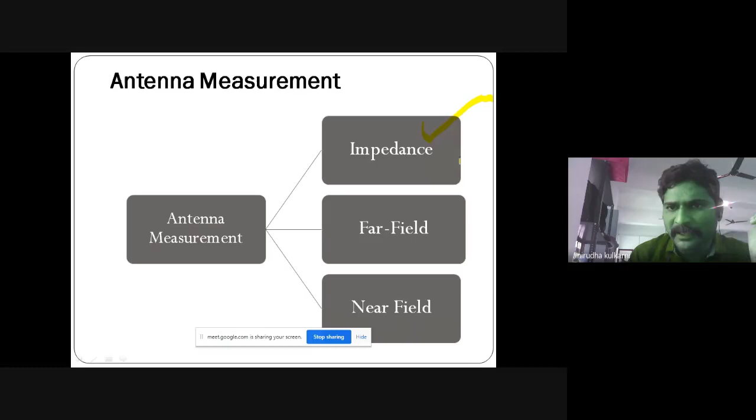Because again, if there is conduction, there is very little leakage radiation coming from your antenna. And if there is less leakage radiation, the EIRP is very low. Okay, so let's first quickly see what kinds of measurements we comply with for the wearable antenna. First is your impedance characteristic, second is far field measurement, and third is near field measurement. As we know, impedance measurement is part of lab testing, like with a network analyzer.

We will check parameters like impedance bandwidth, then the return loss, tunable bandwidth, or VSWR bandwidth. When we talk about the impedance bandwidth, basically it shows at what frequency your antenna satisfactorily works for the 50 ohm impedance, or where your antenna is fully resonating.

But in the wearable antenna, you see this picture. In this picture there are circular kinds of holes, and you try to fit an object that is rectangular, correct? It is fitted, but with the help of some external tools. What are the external tools to handle the impedance parameter? Generally, to handle the antenna impedance parameter, you require a matching circuit, which is the LC matching circuit, very close to the feed of the antenna.

So if you require some kind of L or C matching, some people also do T type or pi type matching for the wideband structure. But generally, the matching circuit is composed of inductors and capacitors, and they have a different impedance track matching phenomenon also. So naturally there are two types of circuits. One is the RF ground circuit for your antenna, where the ground substrate is covering things, and the second is the matching circuit ground condition. So there is an LC ground condition and an RF ground condition.

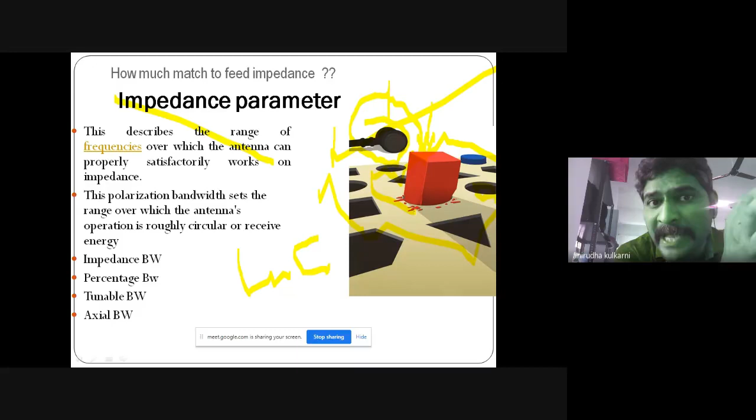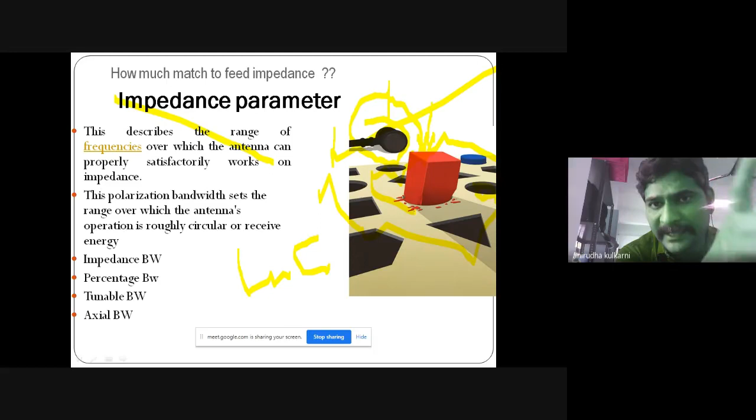With two ground conditions, there is a very critical stage for your antenna for the resonant matching. It is not straightforward matching, because every circuit you attach to the antenna will add its ground looping current, and that ground looping current also takes part in the radiation. This is the first biggest challenge in wearable antennas. Due to the matching circuit and its ground presence, your return current varies, and theory clearly says that if your return current varies, your forward current varies. If the currents vary, your near field gets distorted, and automatically the far field gets distorted.

That's why my first point is, whenever you are doing impedance matching for the wearable antenna, it is a very tricky job, and you do not get a smooth radiation pattern as I showed in the first slide, which is the ideal shown by various simulation software. Simulation software always shows very nice graphs.

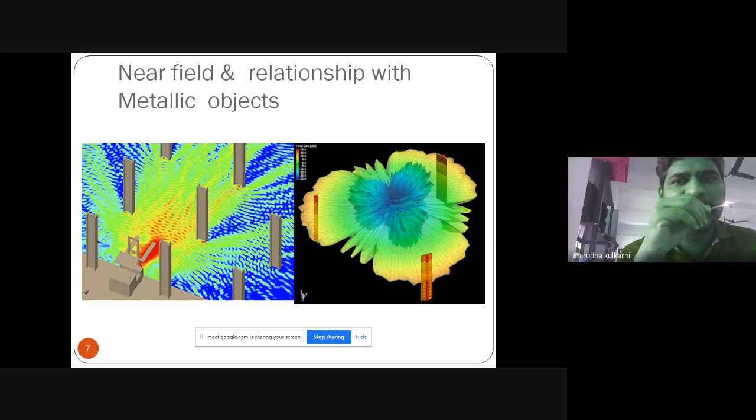I tell you again that all wearable antennas have only one problem, called pattern degradation. Even if you design a lambda by 4 antenna, what is your expected pattern? Your expected pattern is omnidirectional, correct? But in this case, you are not getting an omnidirectional pattern. Here you are getting thousands of side lobes inserted in your main lobe. There are two reasons I already explained. One reason is related to the impedance, the matching circuit, and the second is the metallic object. If metallic objects are there, then there is definitely a problem.

Generally in antennas, we are looking at three types of pattern. One is the pattern called omnidirectional. One pattern is called bidirectional. One pattern is called a very unidirectional pattern. So three patterns are there. The cardioid pattern, doughnut shape pattern, fan or pencil, figure of eight, these are the popular patterns.

But unfortunately in wearable antennas, this kind of directive pattern is very hard to find, because your wearable structure is not that supportive for a pencil kind of beam pattern or figure of eight kind of pattern. Here, for most wearable antennas, the popular structure is the lambda by 4 structure. These are the common antennas which we see in the market. Okay. Now you see these things. What these things actually talk about is pattern.

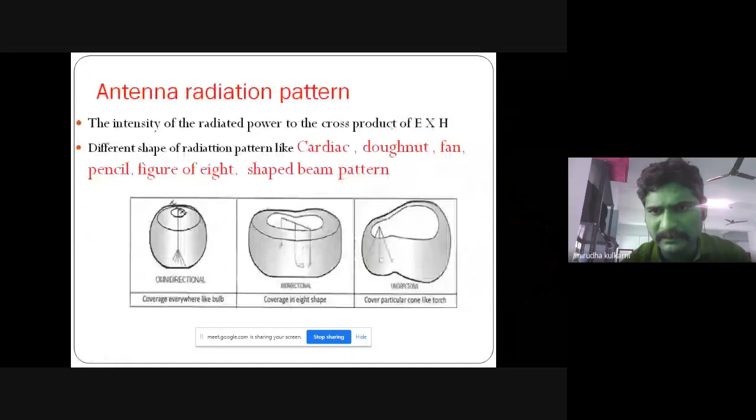So, first few frequencies: generally in ultra wideband antennas, for every frequency there is a different type of radiation pattern. You won't get a stabilized radiation pattern over the band in ultra wideband. It is not possible, correct? But in wearable antennas, the bandwidth ratio is very small and very tough. Even for 80 megahertz or 50 megahertz bandwidth, there is definitely a degradation of the pattern over the frequency. So this is the third challenging job when you are handling a wearable antenna.

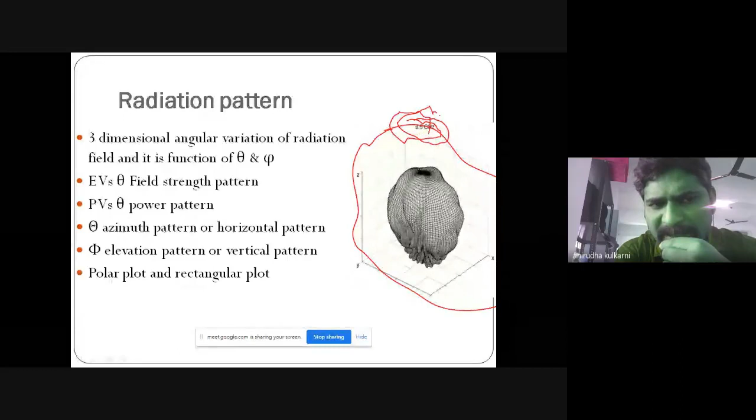When you are handling a wearable antenna, over the frequency band your radiation pattern cannot be constant in theta and phi. Basically, the radiation pattern is the field plot which we plot across theta and phi, correct? It shows our field strength pattern or the power pattern. In azimuth and elevation, you are getting different patterns in the wearable antenna.

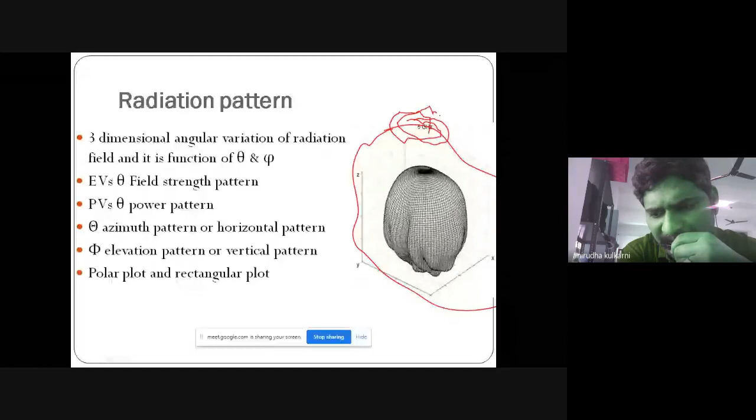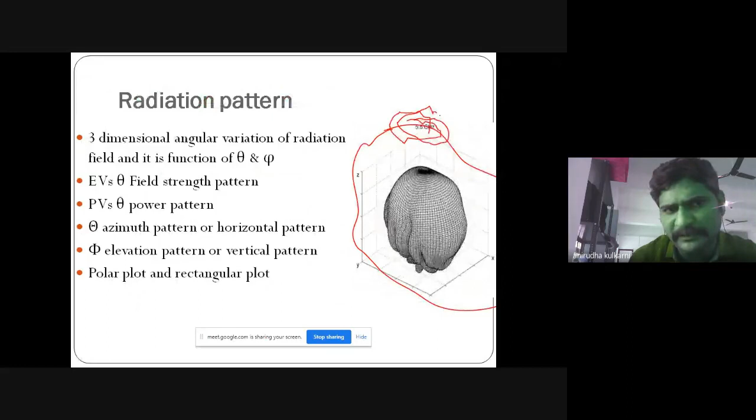Because again, in a wearable antenna, if there is corner folding, what will happen? Due to that folding structure, your elevation pattern is not going to be constant like your azimuthal pattern. That's why in the two planes, theta and phi, you are getting different patterns. Okay, so we say that across the frequency, you cannot find a stabilized pattern in the elevation and azimuth.

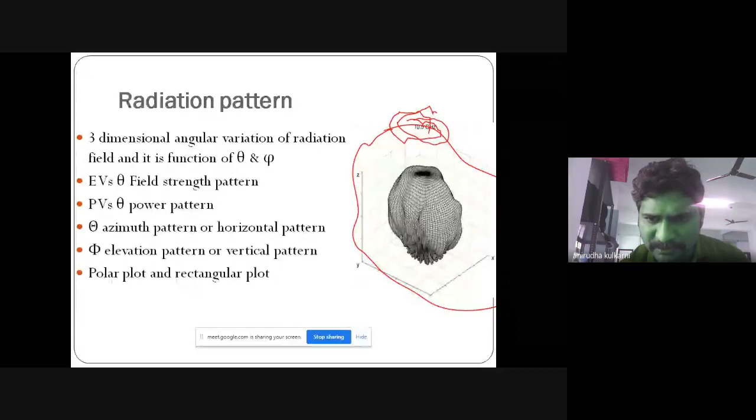So both patterns get deteriorated over the band, and the only reason is physically, when you are giving some tilt angle to your wearable antenna, your pattern gets distorted. Same like that earlier, here you can see this picture. Now there are so many side lobes. If the frequency increases, automatically your pattern cannot stay constant, and there are multiple side lobes generating over the resonance. Now we will compare bad versus good pattern.

So this is the pattern we are expecting at theta 0, but at theta 30, again there is a pattern deterioration, so the pattern gets shifted. And if you see at 60 degrees, the pattern gets multiple shifts, whereas in a conventional antenna you will get only one single pattern at the tip. But when you are simulating or manufacturing the wearable antenna, if you see the plot on the Cartesian side, you will get this 100%.

There is a shift of degree. You can see here is a 30-degree shift, here is a 60-degree shift, and there are considerable side lobes you are getting here. Here you can see the side lobes, but you can control them, which are under the limit. These red color limits are there, but within the limit there is a side lobe. But in a wearable antenna, there is pattern deterioration, which is shown in Cartesian format. You can see.

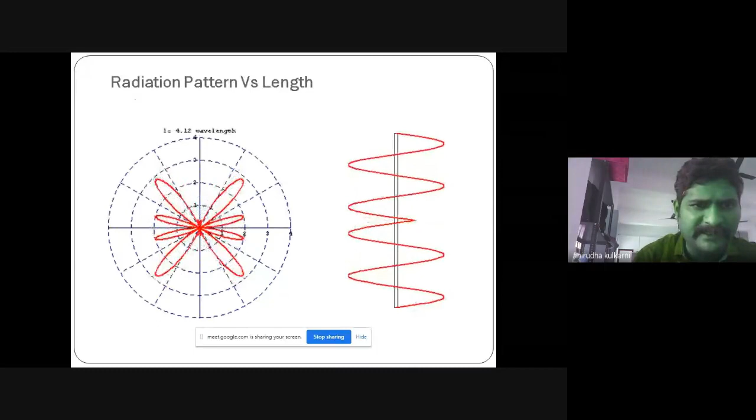Then, generally, if you want to manufacture the dipole structure in wearable format, what will happen? Ideally you should get a figure-8 pattern, but if the wavelength increases, you can see this here. Just observe it. Now I slowly increase the wavelength. What will happen? You will get multiple side lobes, so 8 to 9 side lobes for 3 lambda kind of radiation pattern structures.

This happens only for the conventional antenna, but in the wearable antenna, the story is one step ahead. You are getting 6 to 7 side lobes even for lambda by 2 structures. So that is a much more critical job for an engineer to handle the wearable antenna's pattern situation. There is a second problem related to the point-to-point link.

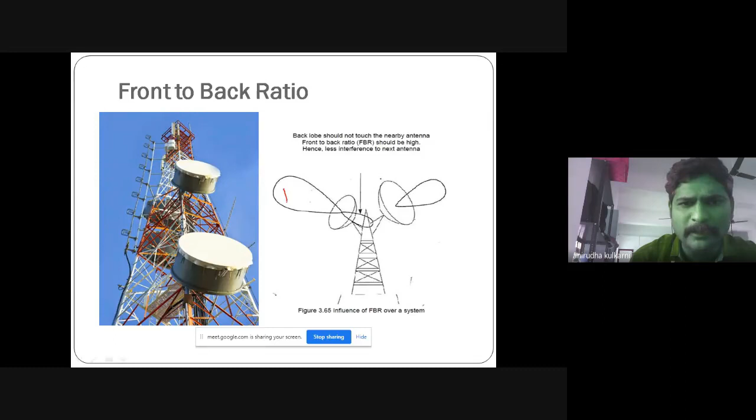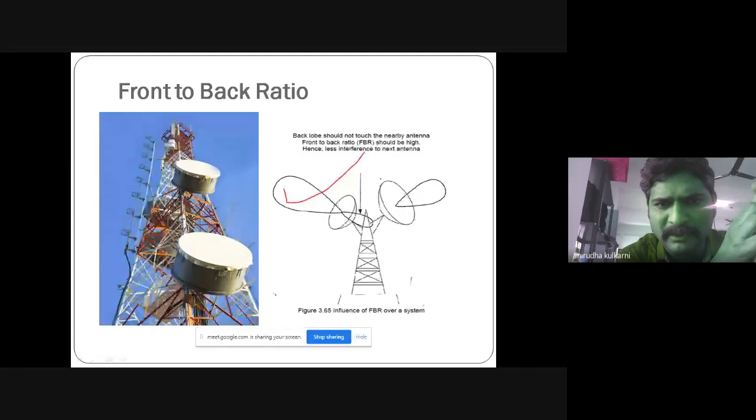You can't use this wearable kind of thing for a point-to-point link, because you need a very directive pattern with very low half power beam width. You need to maintain a half power beam width around 8 to 12 degrees, and that is very difficult in the case of a wearable antenna. So normally you don't put the toughest job towards the beam width side. Then there is the null parameter.

You can't control even the nulls, because if you are using a wearable antenna, your null rapidly shifts. So the second challenge in the wearable antenna is that you cannot control your null parameters, where your signal goes to zero, and you can't control the side lobe powers either. Here in the second picture, you can see this is the MSAT, VHF. So many antennas are there, and if you want to fit your wearable antenna, you have to declare your null parameters, and that's why in multiple critical environments, even these days, these antennas are not utilized in the commercial market.

One more very important parameter is cross polarization. Because of the smaller height of the substrate, your cross polarization level cannot be great. You only achieve around 5 to 6 dB cross polarization level.

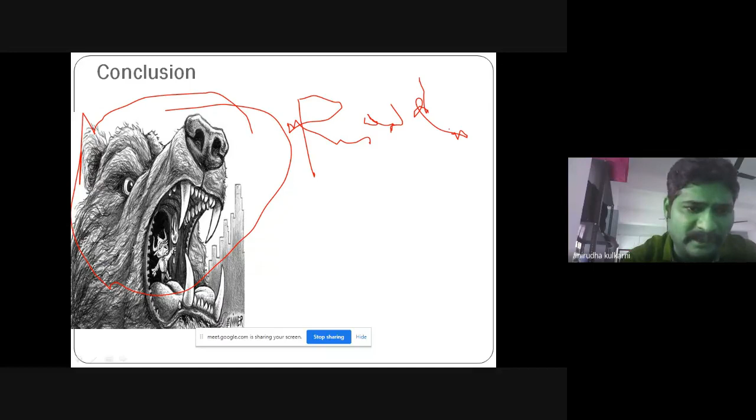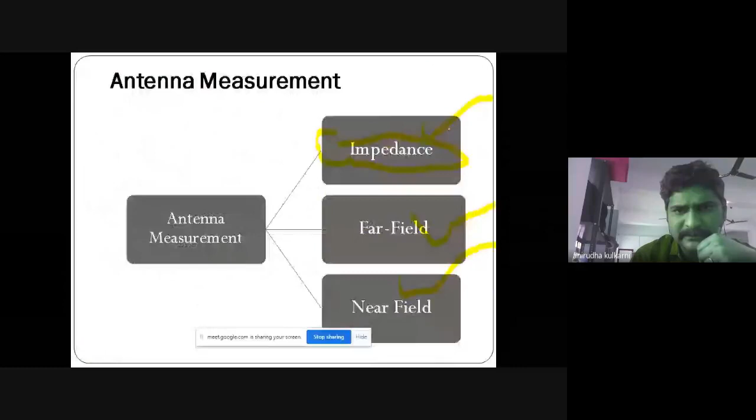In that half an hour, I wanted to present the challenges that happen on the radiation pattern side, which will destroy your pattern. Okay, so again I come to my first slide. This is our aim, but to maintain the same, there are so many challenges. Four bigger challenges are there, and due to that the radiation pattern is very difficult to manage across your impedance band.

Okay, so I share one software also. CAD FEKO is the name of the software. Maybe you have heard this name. There is one software called CAD FEKO. I recommend it because I utilize the MLFMM method, that is the multi-level fast multipole method, which is considerably good to calculate the radiation pattern after placement of an antenna.

Because see, making a wearable antenna is one thing, but when you place this antenna, you get pattern deterioration or degradation. Even if you design a lambda by 4 architecture with an omnidirectional pattern, when you place it, mostly your pattern gets deteriorated. And now I will suggest one more thing with wearable antennas: you have to make a particular coating, which will reduce the near field current. If that near field effect is reduced, your pattern gets clear, successfully propagating to the Z direction.

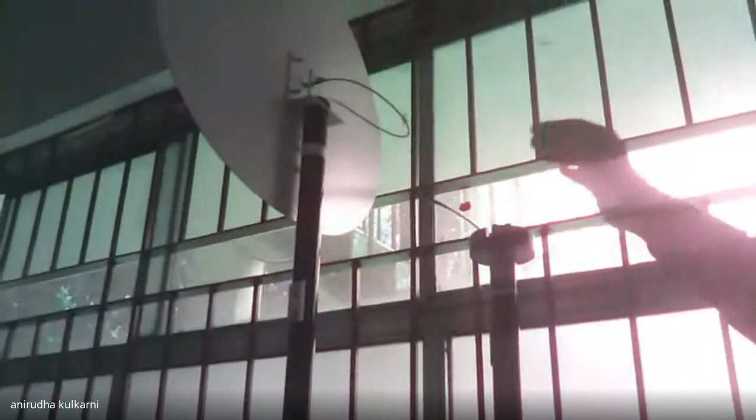Most of the time we have seen that the pattern is not propagating in the Z direction, it is going abruptly. And EIRP, effective isotropic radiated power, is also not going to be covered. If you want to handle such kind of antenna, I will show you some material right now. I will rotate my camera to you. So in front of you, here are some structures before the reflector antenna. These structures are made of PTFE material, polytetrafluoroethylene. If you utilize this material for the placement of a wearable antenna, your radiation pattern does not get affected.

So here is our test rig. People are doing testing related to range, and we call it a virtual loss test. How far your antenna should reach, we virtually give that environment in a lab, and then we calculate the loss over a particular distance. There is my friend Mahesh, who talks more about the manufacturing side of various antennas, as well as his valuable experiences from the last few years in this antenna region.

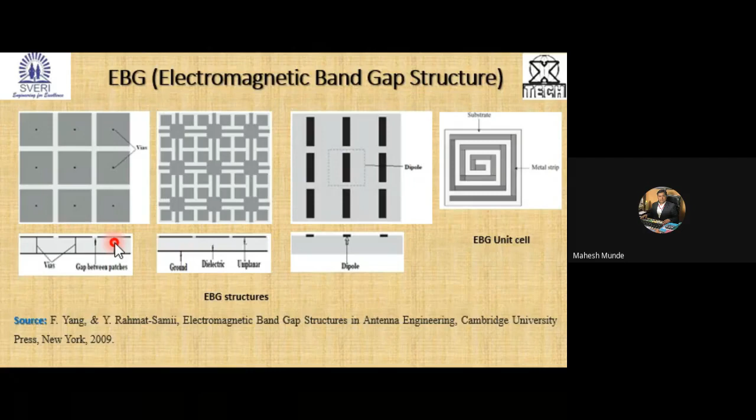So this is my conducting part, a perfect electric conductor, PEC material. Earlier days it was very difficult, but now due to the evolution of micro machining and fabrication techniques, machines like LPKF can create vias very easily.

This has become simpler and attracted more designers towards EBG structures. Stop band and phase reversal characteristics, one of the most prominent features of EBG, can be utilized. Whereas if we use the same material and print on it, the cost can be kept optimum, as far as AMCs are concerned, because in case of AMC or metamaterial, we require different materials, but on simple FR4, you can create this.

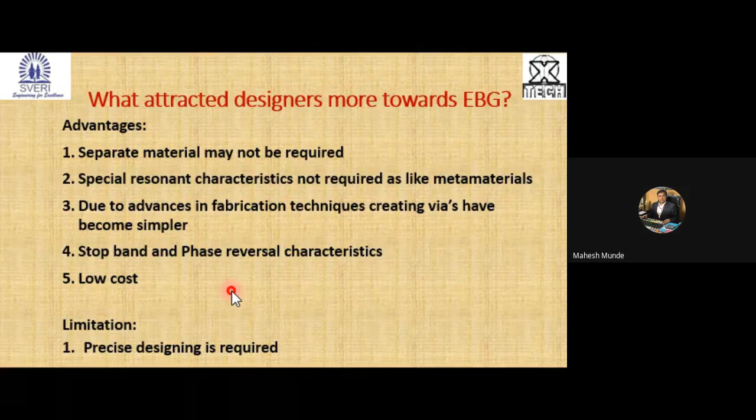The only limitation of using EBG is that you require precise design and precise dimensions during fabrication. Manually, your results might vary from the simulated ones at a very different rate. But if you go with micro machining or automated fabrication machines, the results will be much closer and much better. So EBG structures are artificially periodic structures, most often periodic, but some researchers have utilized them in non-periodic natures also.

These are structures which either prevent, that means stop or block, a particular band of frequencies, or assist those particular frequencies. That means it can filter out or enhance the same band of frequencies. So it has both properties or capabilities during propagation of EM waves in a specific band of frequencies. For a particular application, you have to design a particular EBG structure. Not all EBG structures are suitable for all particular bands.

So one of the challenges is to design wideband or ultra wideband EBG structures, and you can get a thesis on wideband or ultra wideband EBG structures. What they normally do is, at any incident angle, if plane waves or surface waves are incident on that, at any polarization, might be linear, circular, or elliptical...

They can either block the wave completely, meaning good efficient filters can be designed—so an antenna can be a very good filter too—or particular pass band or stop band filters can be designed efficiently. Nowadays a new concept is coming out, antenna and filter combined. So a few researchers have named that 'filtenna', a filter and antenna combination.

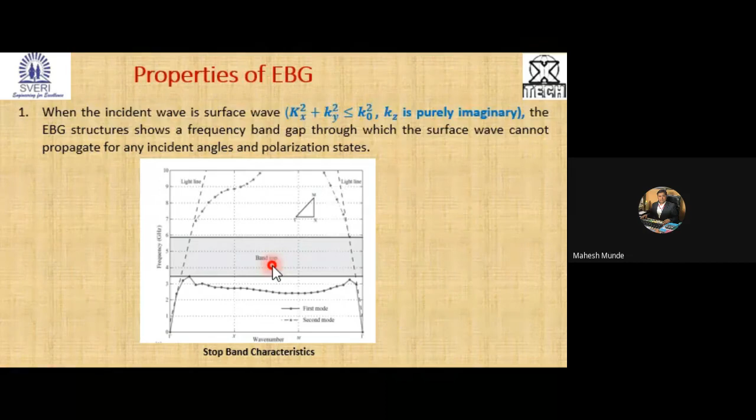Another property is, if Kz gets a real value, then my incident wave will act as a plane wave, and whenever the incident plane wave hits the material, the reflection phase of an EBG structure will vary from plus 180 to minus 180, and a point will come where you get 0 degrees phase. So if I get 0 degrees phase, that material will resemble a perfect magnetic conductor, which is not available in nature. So we are artificially creating this material.

So at a resonant frequency of 5.8, if my application belongs to 5.8 or 2.4, in case of wearables we normally prefer the higher bands nowadays, 5 gigahertz onwards. So 2.4, either for WiMAX 3.5 or 5 onwards, might be 5.176, might be 5.5, might be 5.8. Newer 802.11 ABGN standards are coming out.

So to achieve this reflection phase of 0 at that particular point, your tangential component will become completely 0. That means no surface wave will exist, which means I'll get a better impedance match. So my VSWR in that particular band will be below 2. This is how we utilize the property of the EBG structure.

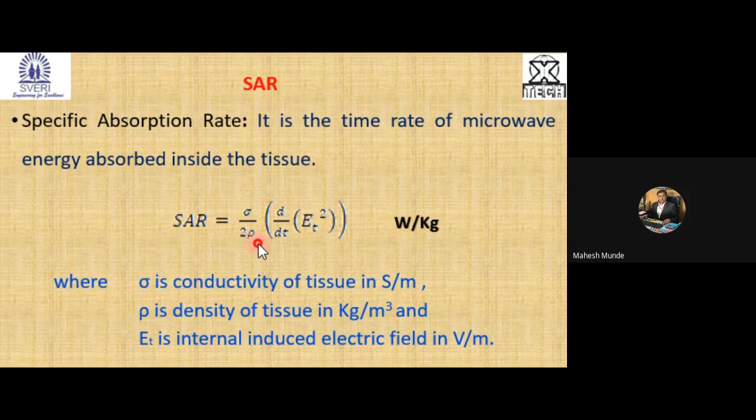So you get many voxel models inside the simulator that you can work with. Specific absorption rate is a standard and measure for absorption of RF fields, and the United States has adopted standards and set guidelines based on the recommendations of ICNIRP and FCC.

So they have set that in case of mobile phones, when you are using one near the head, the SAR value of your mobile phone should not be more than 1.6. This is what the Indian TRAI and DOT also refer to. TEC is a separate division of DOT, where any foreign or Indian company launching a mobile phone into the market has to get compliance cleared from TEC. The SAR value should be less than 1.6 watts per kg in 1 gram of tissue mass, and they use the Cosmore model to evaluate this SAR value.

The European Union has adopted some standards that are less stringent, using 2 watts per kg in 10 grams of tissue mass.

So the FCC governs whether your compliances have been met or not. Without FCC certification meeting compliance, the particular handset is not approved, and only then will the handset be launched into the market.

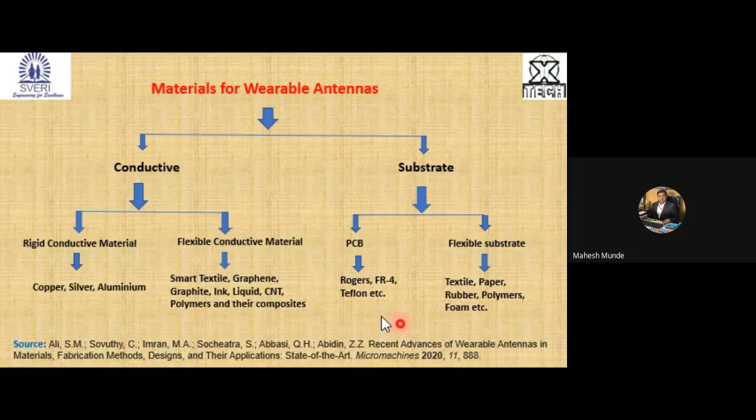And nowadays the flexible materials are also available. In case of textile, either paper, rubber, polymers, foams, these are available. So these are the materials you can explore. This is one of the good papers where they have shown different materials along with their properties.

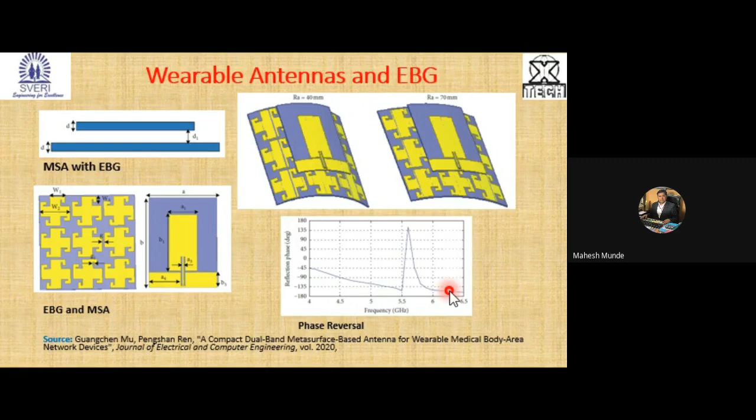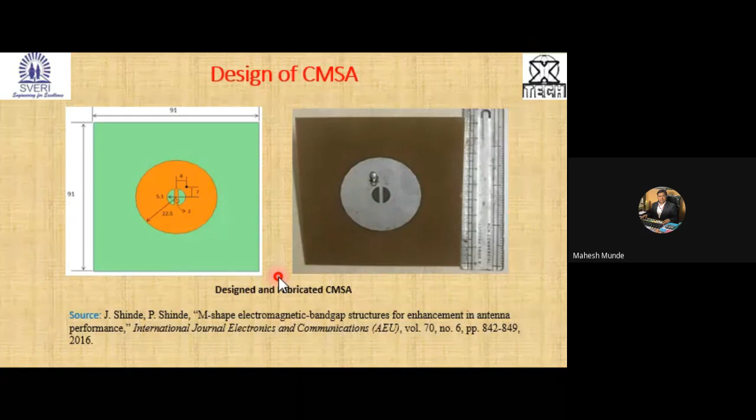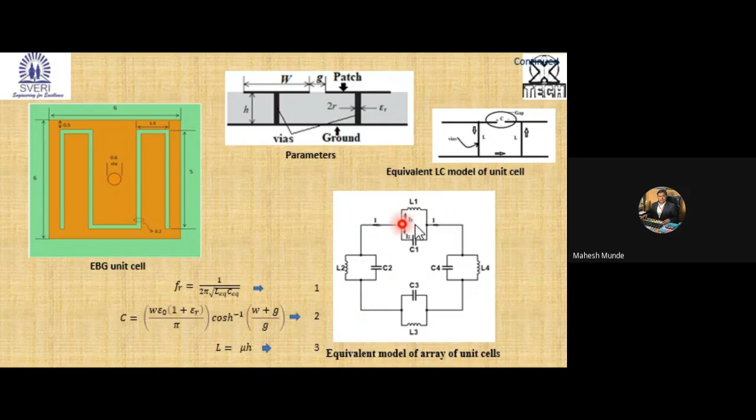So this is in what fashion you arrange them. You need to carry out the equivalent model of the unit cells also. So you will get a model of the entire EBG structure, and how it will enhance the properties can be seen. In this particular fashion, the antenna will be in between, and my array of unit cells is going to surround the antenna. That is how the equivalent model will work.

So at any plane incidence angle, the whole ground is acting as a pure conductor. The waves have a property that if the surface waves are moving in this direction, on the ground they will move in the reverse direction. So the magnitude or the gain will get reduced in that case.

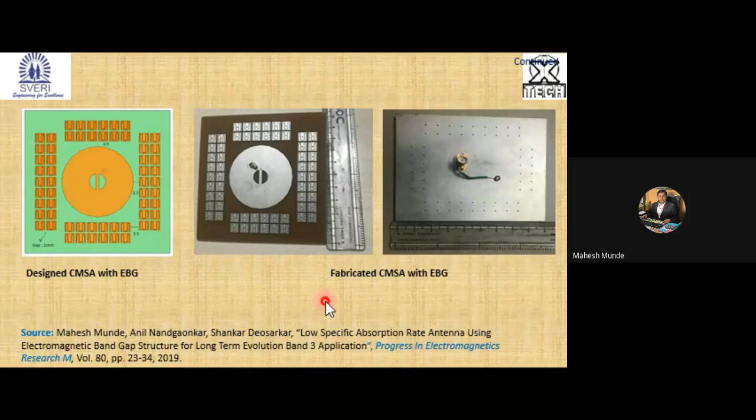So how to enhance it? The current will move through the hole, go down to the ground plane, get a 180 degree phase shift, come back on the top and be diverted towards the front direction. So in this case, we don't require another EBG structure or a different material. The same material can be utilized to create an EBG structure. This is the enhanced version being published in PIER.

So now, how do I analyze this unit cell? There are 4 different methods, but we have used the suspended line method in HFSS. Now, which resonant frequency must I tune to? My application was 1800 megahertz, long-term evolution, band 3. First we have to target the application of the antenna and then we can model the unit cell.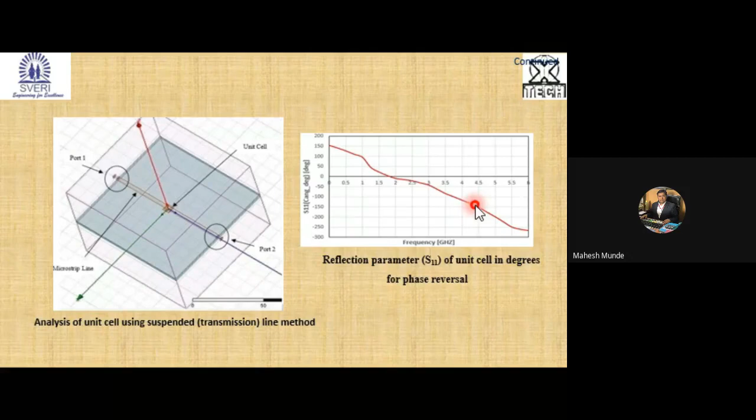These properties are available on the ITIS Foundation website. They continuously go on updating, and the database is free. You can simply put in the frequency and download the properties of all the parts: the pancreas, wrist, bones, muscles, heart, kidney, if you're working on special health applications. One of my friends is working on tumors, so he has downloaded different properties from the same site for hyperthermia treatment.

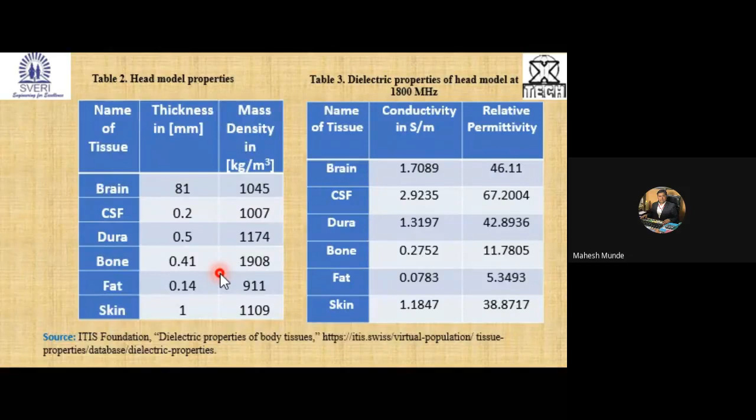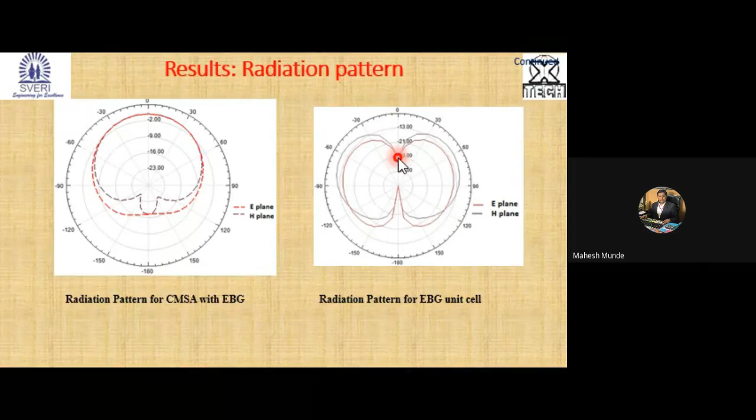These are the radiation patterns. With EBG, my radiation pattern is much smoother in the E plane and H plane. This is for one particular unit cell, a donut-shaped pattern in both the E and H planes. These are the gain plots. 2.2 was the simulated gain of the antenna without EBG. The gain for one particular unit cell is 1.22 × 10^-2, so the smaller 6 × 6 patch contributes around 0.012 dB of gain.

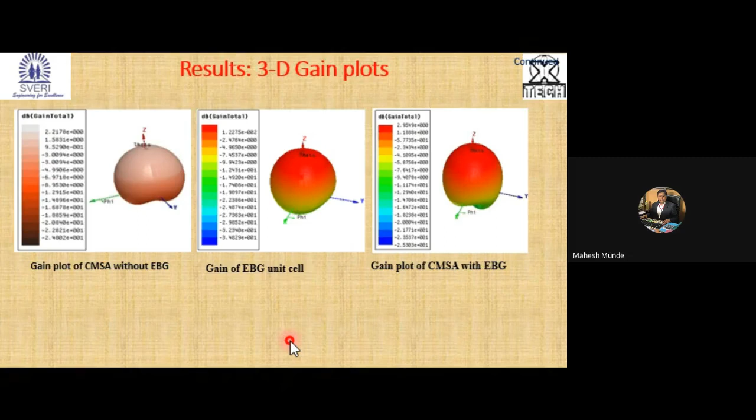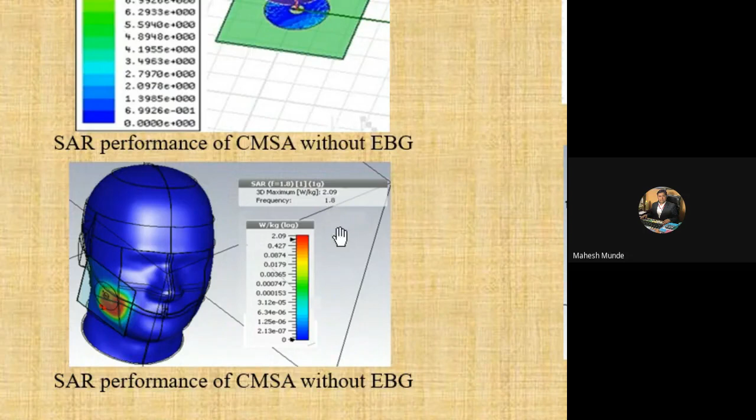The most important part is specific absorption rate. In HFSS, based on the color shade, you have to identify what the value could be, but CST gives the direct exact value. So CST is much better for SAR measurement. Without EBG, at 1.8 for 1 gram of tissue, it was 2.09, which is above the limit of 1.6 watts per kg. So how do I minimize that?

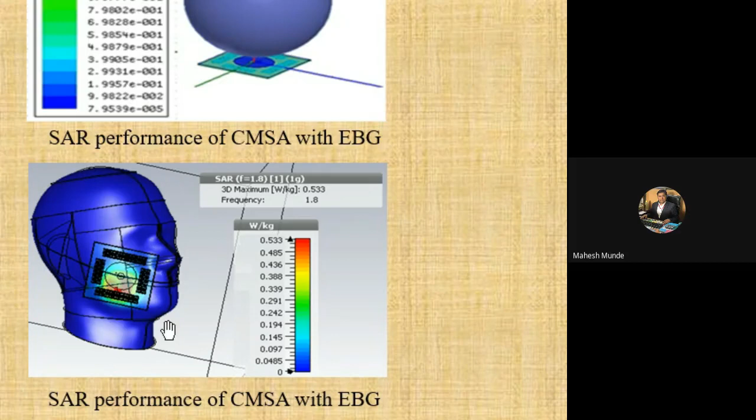So this is how it is utilized. Myself, Anirudh, and our team have come up with a very innovative and very low cost solution for measuring the antenna: how I measure the antenna in open air.

In case of an anechoic chamber, to build an anechoic chamber I require around 30 to 40 lakhs investment. So why not use this? This entire measurement setup is around rupees 5,000. So these are GPS locating devices, and we have tested the antenna in a live environment as you use in your handset. So these are walkie-talkies, the programmable walkie-talkies.

Normally these walkie-talkies use much lower bands in megahertz, around 415 or 470 megahertz. But these were programmed for 6 different channels, and the band was tuned to 1.8. The antenna is 1.8, the same frequency, but only with the EBG structure. And this was the main base station antenna, and these two were roaming antennas, and they communicated well.

So if time permits, I'll show you the video, a small 4 minute video on how we evaluated the radiation pattern. And I could show you in MapSource, which is one of the software. In a live environment, we could check how much range I am getting and what my radiation pattern is. So this is the radiation pattern, omnidirectional, which is required in most mobile handsets or handheld devices. And this is the range, around 300 meters we have covered, by providing 0.5 watts input power.

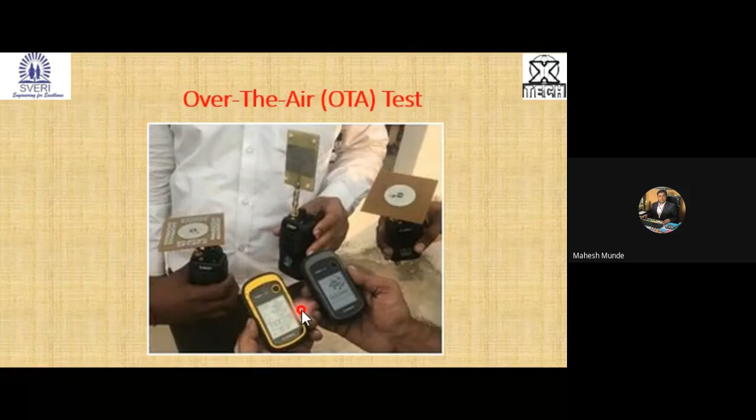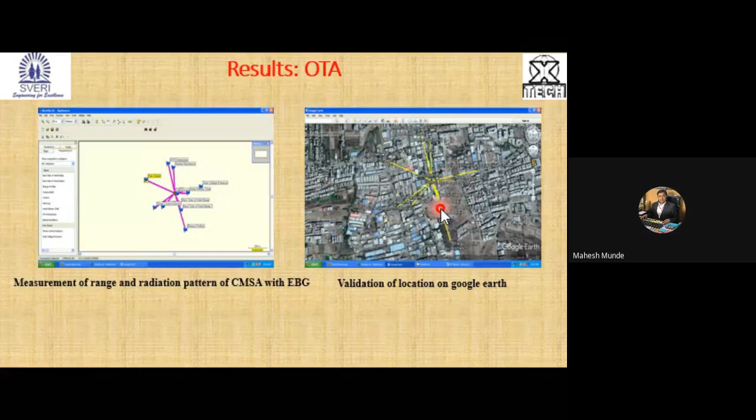Some of the observations we have already discussed, so there is nothing much in discussing these conclusions. Mostly what we could see is the radiation patterns are enhanced, as well as a particular stop band. Beyond that particular band, 1.8, the bandwidth I required was around 200 megahertz. Above that, the entire band was blocked. So a much finer selective receiver you can design using EBG. This is one of the prominent features of EBG.

Now, in case of selective receivers, nobody has yet used the EBG structure. This is one objective you can set and use. So deploying an EBG structure will reduce SAR considerably. The main intention was to reduce the SAR. So this was another design, the annular ring, basic design. These are the formulas through which the length and width were calculated. So the earlier design was with the partial ground.

The antenna is the well-known monopole, circular monopole antenna. In KP Ray's book, you could find the same design with some different dimensions. Now that has turned into an annular ring. The main thing here was the SAR was very exhaustive. SAR wasn't coming in the range below 1.6. So the novelty of this particular design is giving two different input feeds.

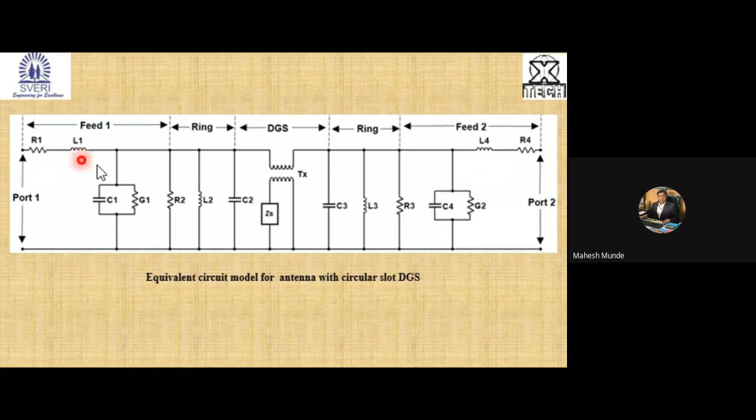So this is the fabricated prototype. This work was published in PIER B recently in October 2020. This is the equivalent circuit of the DGS. So this is the DGS, and this is my ring part. This is another ring part, annular inner and outer, whereas these are the different feeds, feed 1 and feed 2. What you could see is the parametric study we did for different dimensions, such as feed length.

So it was optimized to 23 mm. Then different widths, feed widths; it was optimized to 3.6 mm. What you could get depending on the reflection coefficient, or S11, or return loss, what you are getting. So this is the orange mark. What you could see is with the reduced ground, with full ground, with partial ground, with the 25% ground and the circular ground.

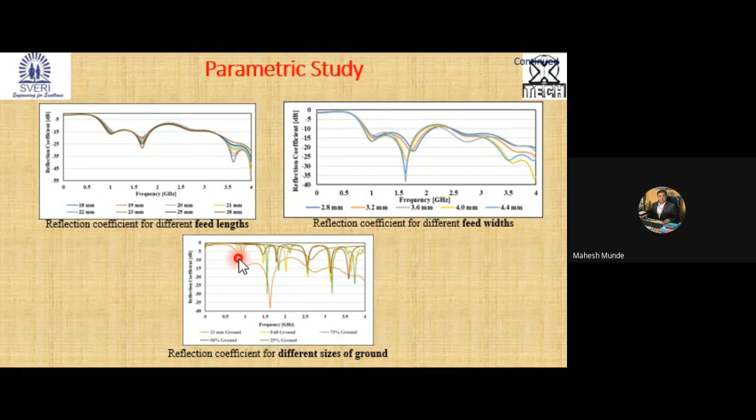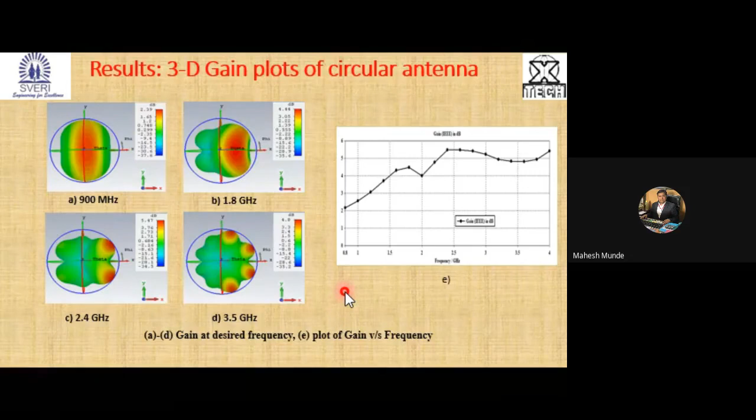But if I choose a Rogers, the 8x8 PCB will cost me around 12,000, 8,000, depending on the dielectric material, 2.2 and onwards, or in case of MICS band, 10.2. So that will cost much more. My cost will increase if I prefer Rogers. If I want to produce low cost antennas, FR4 is better. So in case of FR4, I need something different which will minimize these losses. By providing two different inputs, my losses have been reduced.

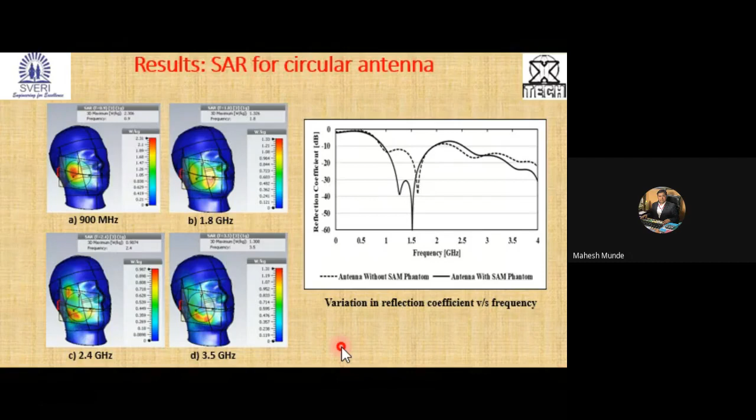Now SAR for the annular ring antenna: what we did, we removed most of the conducting portion. Without change in the band, we have tried to reduce the SAR value. Just a moment, my mouse is troubling me.

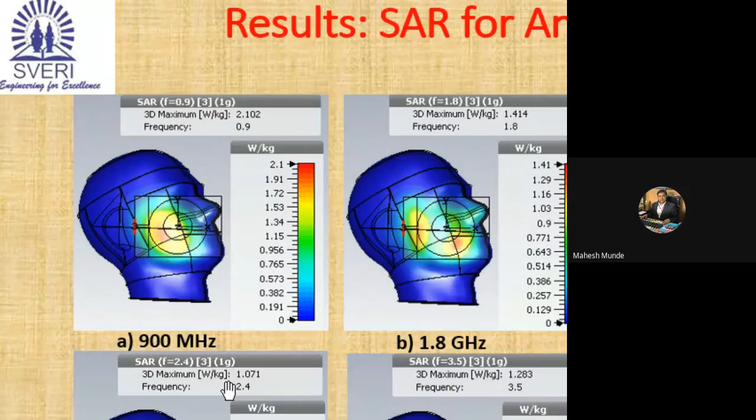You could see in the earlier case it was 2.3, now it has reduced to 2.1. We are focusing on only this one because all other bands are within the limits. Still, in case of the annular ring antenna, it has not helped us much.

We targeted this to get a multi-band operation using circular DGS. In the earlier case also I was getting multi-band operation, but now I can get the entire band covered from 0 to 4 gigahertz. That was the target.

Whereas I have used a dual input with reduced power, so that my SAR will come at a lower side. That was the reason for using a dual feed.

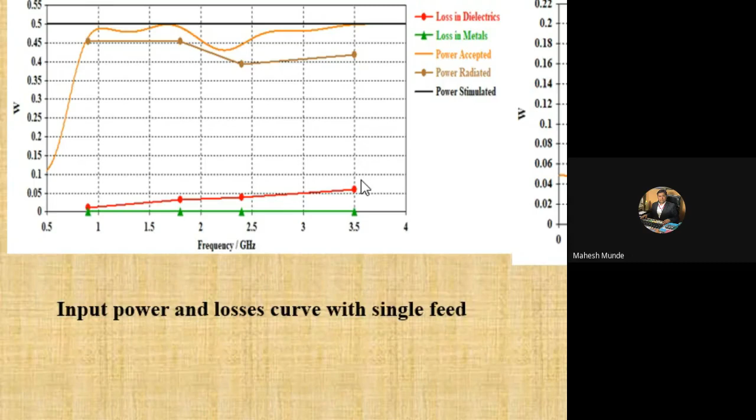Now if you look at this, you can look at the scale. What you could see is 0.02. These are my dielectric losses. Conductive portion losses are less. Still, we choose lossy material to simulate.

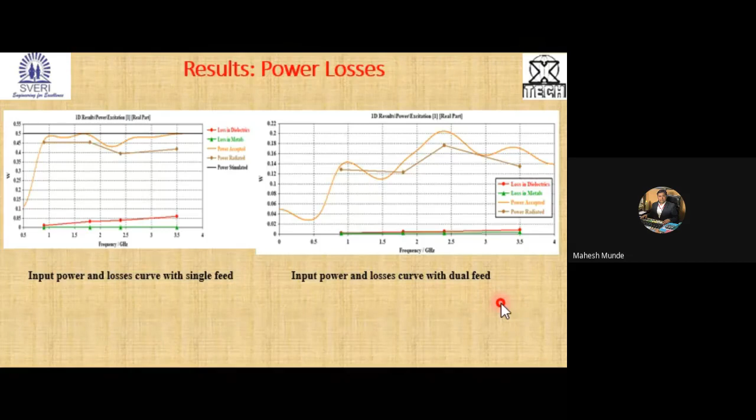If we choose loss-free material, then these losses in metal will vanish. But ideally, that kind of material is not available. So this is how the losses are reduced by using dual feeds.

So this is SAR for dual feed. What you could see is SAR has been drastically reduced. Earlier it was 2, now for 900 megahertz it is 0.695 with the help of dual feeds. Port 1: 0.5 watt, 0 phase. Port 2: 0.5 watt, 180 degree phase.

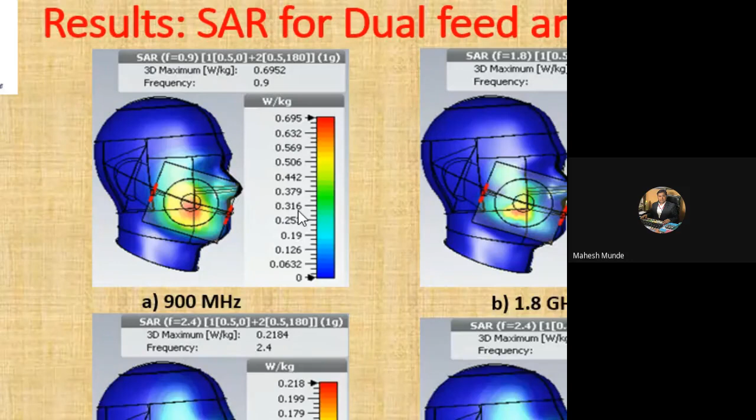We have simultaneously given input to both ports. Both waves are superimposed and back lobes are reduced. So my SAR is reduced simply by playing a trick: feeding half power with a phase difference on both ports.

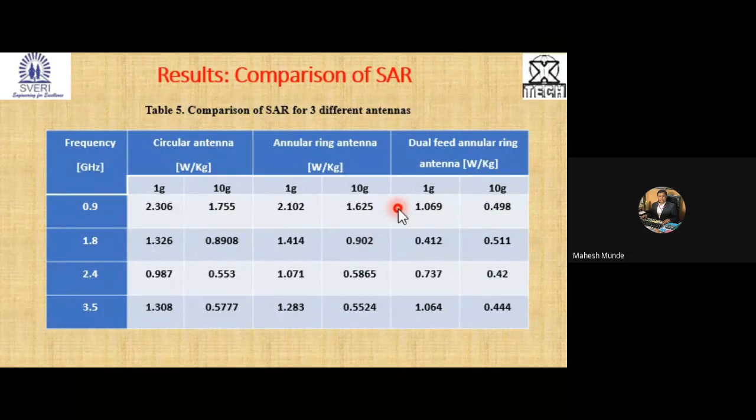The same concept was extended because the size of the antenna was not suitable for smaller, slimmer handsets. The size was 110 by 120 mm, so it was suitable for a calling tablet. This is the comparison given in case of SAR. So by simply using a defective ground, my SAR is reduced by maybe around 80%.

The other approach is miniaturization. The simple concept we can use is that my structure will resonate for every lambda, or fraction of the lambda. If I'm using lambda by 2 or lambda by 4 for a design, I can go into a fraction of the lambda, get a multiplying factor, and design the structure to automatically miniaturize it. In a simulation tool, you also have an option in macros where you can optimize the design and the simulator will work for you.

So this was the reduced, smaller portion. You could see 120 has been reduced to 50. Almost the length is reduced to 40. That means a 3 times reduction is being achieved.

Now, to get certain different characteristics, we can play with characteristic mode theory. In this case, we have played with the characteristic modes. That is another topic, it will take much time to cover how we can play with the modes.

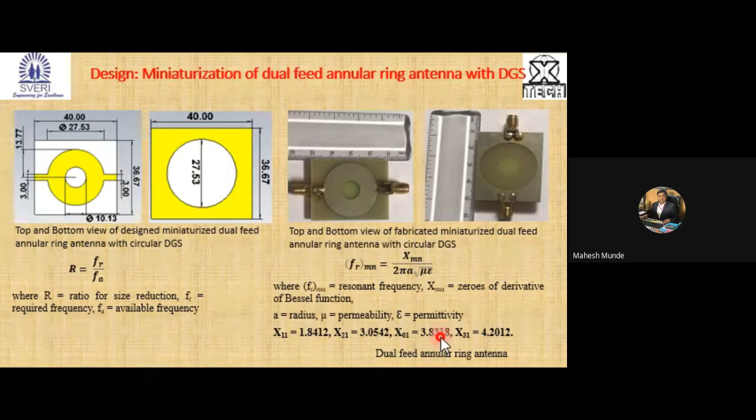So this is how a parametric study was carried out, and we could see what I could achieve with size reduction. In case of size reduction by 1.5, you could see the broadening observed in this orange wave. If you see the blue, it is much narrower. These are my harmonics, F1, F2, F3, and so on, which have to be blocked. So the intention was to broaden the pattern, the waves.

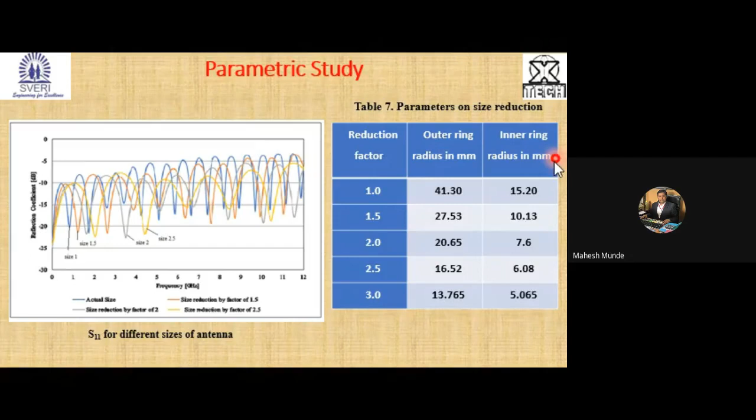This is completely trial and error basis we did on this, with the outer ring radius and inner ring radius. The ratio has been completely reduced. What you could see, if we analyze the surface current, is that the spurious radiations are near the feed.

So I thought, why optimize? In the earlier case, we had to optimize SAR for 900 megahertz. But now I found that more energy will move back to the feed because my feeds are giving spurious radiations. So why not optimize only for 2.4? So we started working, because through practice your understanding becomes better.

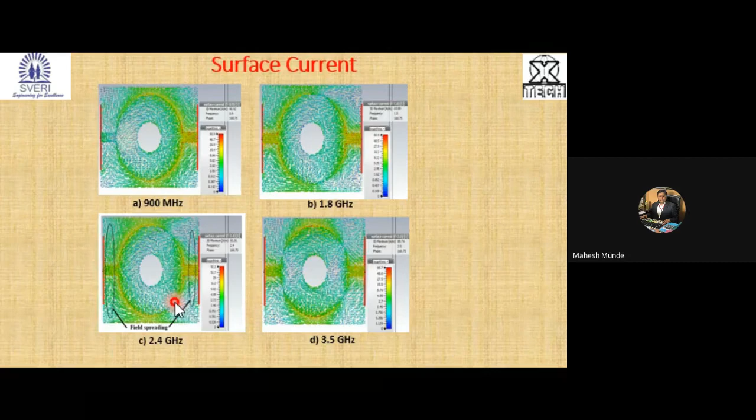My target was 2.4 because my surface current was more there. If you see the value, it crosses 90, whereas for others it is below 80. That means I targeted this particular value because my surface current is more in this case, so E field will be more and SAR value will go higher. So why not target only that, because for multi-band I have to build different narrowband EBG structures. So this was the target, 2.4 gigahertz.

The placement of EBG cells near the feed is simply by observing the surface current. The feeds are acting as spurious sources, so why not place the unit cells around the feeds? That was the idea behind this. The second review is submitted, and this paper will be published in IET.

Now, as the size was reduced, we wanted to test it in a live environment. So we changed the phantom model to see how my radiation pattern deteriorates and changes when I place the particular antenna into an actual handset and use it along with the model. These were the properties used for the model, which is now available in CST 19, so you can import and use this model.

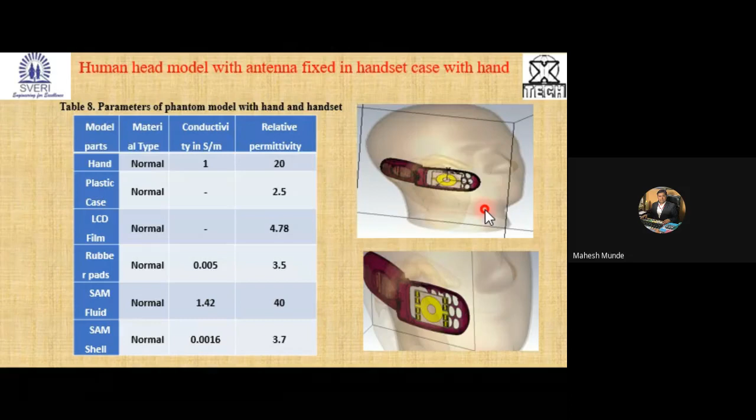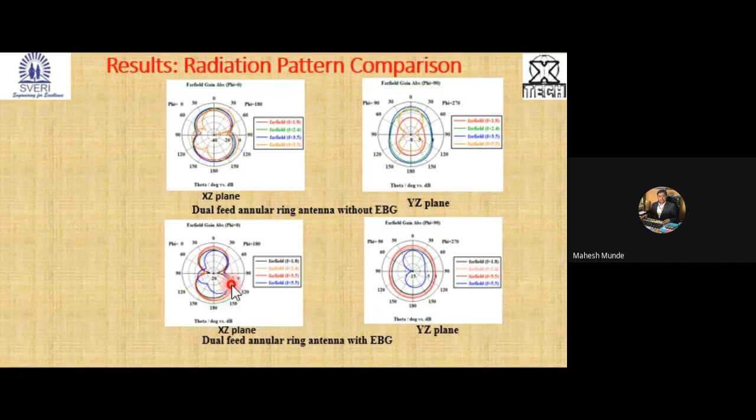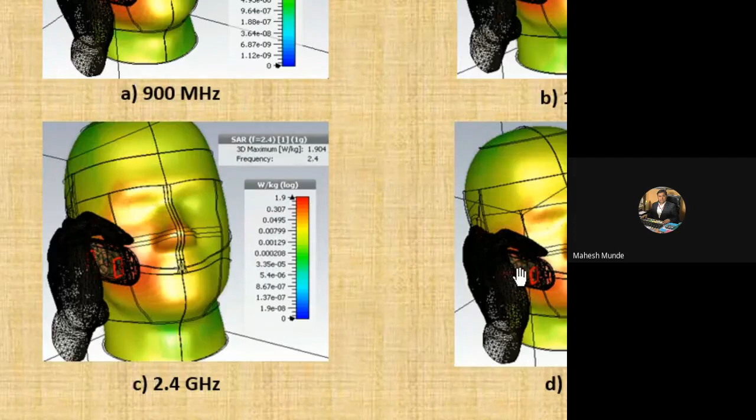Definitely SAR will get reduced. So this is the gain what you could see. So what we have achieved is at 2.4, 82.86% reduction was achieved. Without EBG, it was giving 1.9, and with EBG, it is giving 0.326. Huge, tremendous reduction. So this was achieved, and I'll show you only for 2.4. So this is 2.4, 1.904, when without EBG, you could see the antenna fitted into the case of your mobile phone.

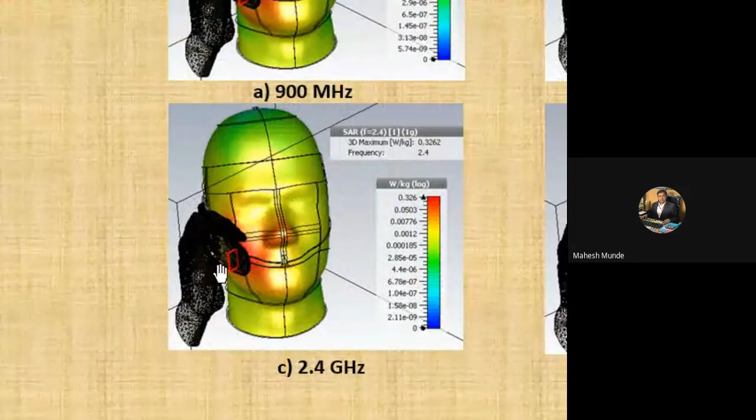And over here, you could see, if it is visible, the EBG structures are placed near the feed. For 2.4, it is 0.3262. So this was achieved using this antenna. Then size reduction was achieved. Further, by using EBG structure, SAR was further reduced.

Professor Mahesh, can I take further 5 minutes? I crossed already the deadline. Yes, sir, yes, no problem.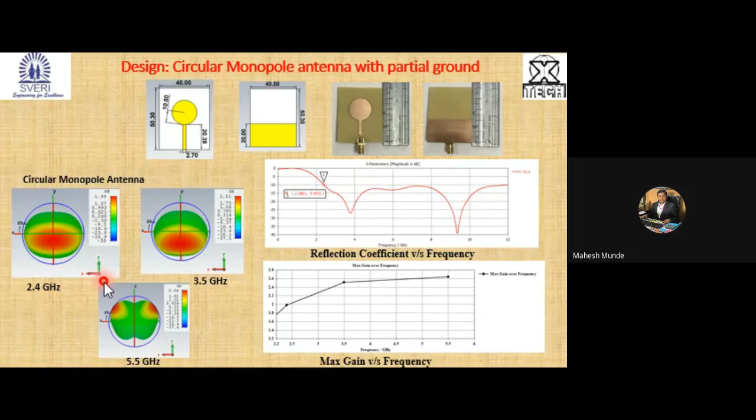So this was from 2.4 to 12 gigahertz, but mostly for applications we use this particular band. So I have focused on only these particular bands: 2.4, 3.5, and 5.5. So this was one of the designs, a simple monopole antenna. The radiation patterns, what you could see at different frequencies.

Then the SAR value, tremendous rise in SAR value, 1.5 only at 2.4, whereas it has crossed much higher limits at 5.5 gigahertz, 8.5. In case of wearable, you have only this option for this particular antenna. If you make this antenna on a flexible material, it will work as a wearable antenna because it covers all the bands. Only according to your dielectric material, according to your thickness of the material, your dimensions will change. That's it, nothing wrong in this antenna.

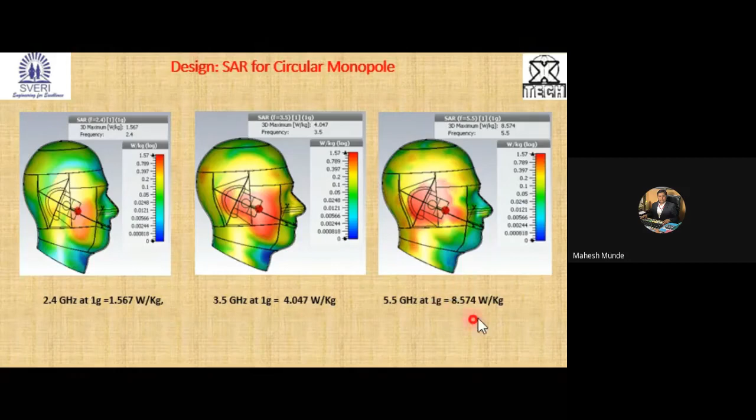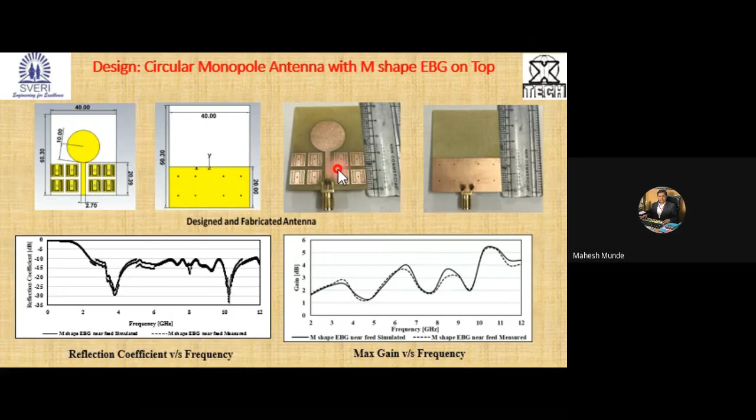So what you could do is, the SAR value was much tremendously high in this case, 8.5. So we come up with top surface with M shape, earlier designed EBG cell. We placed 2, then we placed 4 on each side, so 8 unit cells. Still, my SAR is 3.5. But from 8, it has reduced to 3.5. So that was the achievement.

But still it is not into permissible limits, right? But for 3.5 and 5.5, we normally do not use these frequencies for calling, right? We use this particular frequencies for different applications like Wi-Fi and all, when my device is away from the body. So there is no major restriction. But what happens if I use MIMO antennas?

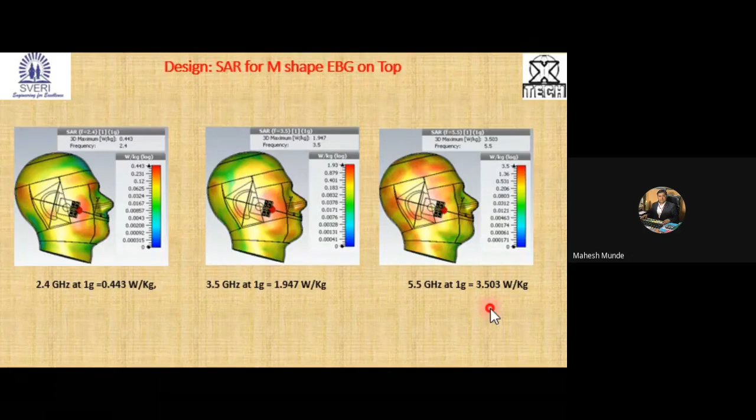One antenna for calling, another antenna for different applications, Bluetooth, Wi-Fi. In recent handsets, we have multiple antennas being fitted, right? Now, in this case, what happens? Both your antennas are active, consuming power, right? In that case, they will superimpose SAR, and your SAR will tremendously increase.

So at 0 as well as at 180, what I could find, both are spurious. That means towards the feed as well as towards this portion. So if I place that, either the waves radiated from this end will move into the head, or radiated from this end will move into the head, in either cheek position, right? That has happened for 5.5. So most of the radiations are over here, far field.

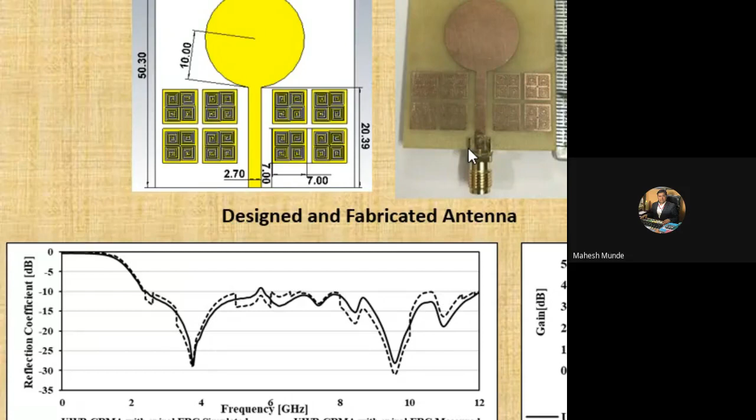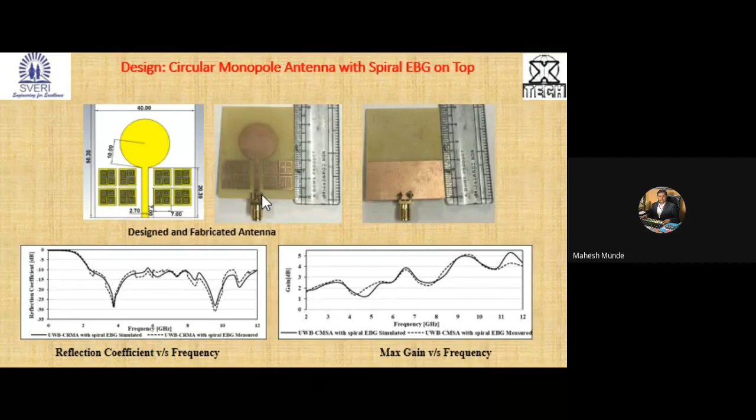Again, 4.4, much beyond the limit for spiral also, because the spiral gave us very good results, because in case of spiral we have used only a simple planar structure. The earlier structure was mushroom type, with a hole through it. Over here there is no hole in case of the spiral structure. So a simple planar, uniplanar structure, spiral EBG.

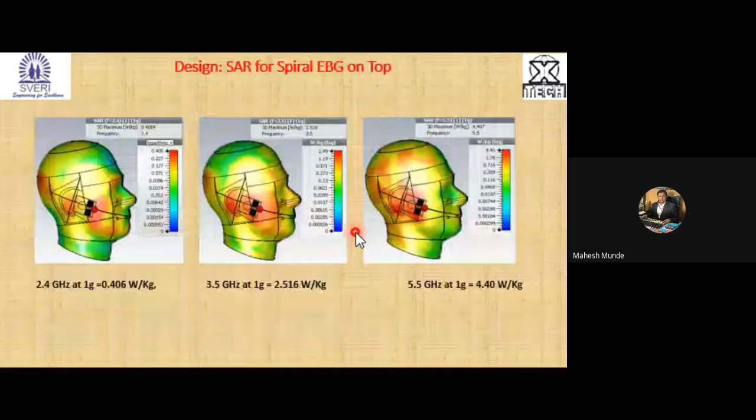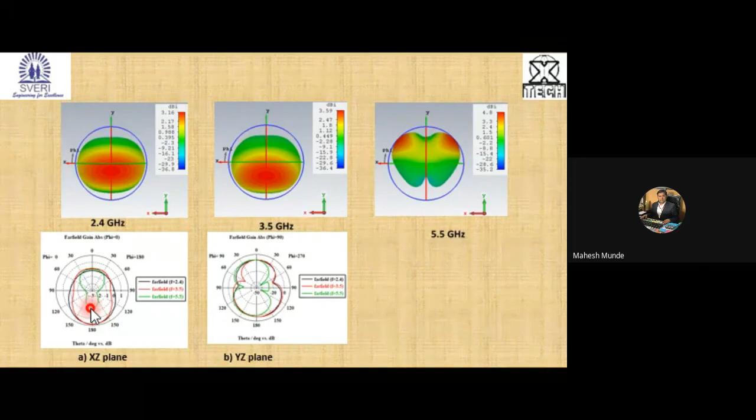Now we have used that on the back side, because most of the 5.5 radiations were over here on the top side. So we have put it on the back side where the spurious radiations for 5.5 gigahertz might be coming out. So that is being observed. Now you could see the lobe that was going here for 5.5 has pulled back inside, right? That has happened due to placement of this. And this will reduce my SAR to a certain extent.

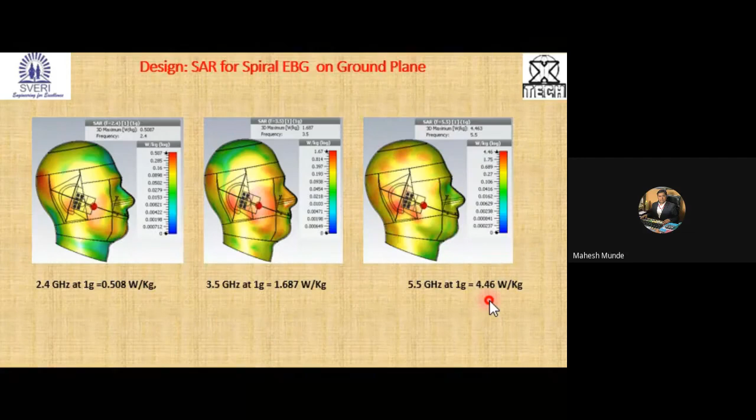So still what we got at the simulated was 4.46, the simulated value. Then we used a novel concept called hybrid: 4 unit cells mushroom type, and 4 spiral type. This was the novel design which is published in AEM, Advanced Electromagnetics. What you could see, 4 through via and 4 without via. This has given us very extraordinary results in case of SAR. The patterns, again, are all similar.

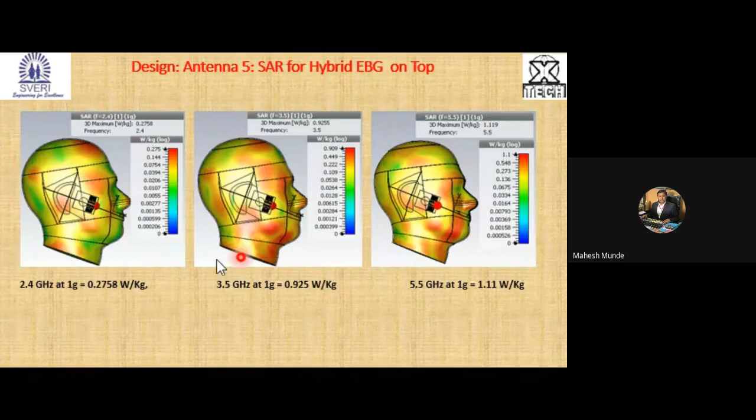But what you could see is for 5.5, all were around more than 3 watts per kg, right? But for 5.5, it has been reduced down to 1.11, much below 1.6, what was desired. And already these bands were lesser than 1.6. This was our achievement. These were the designs I wanted to conclude. A comparative statement is over here.

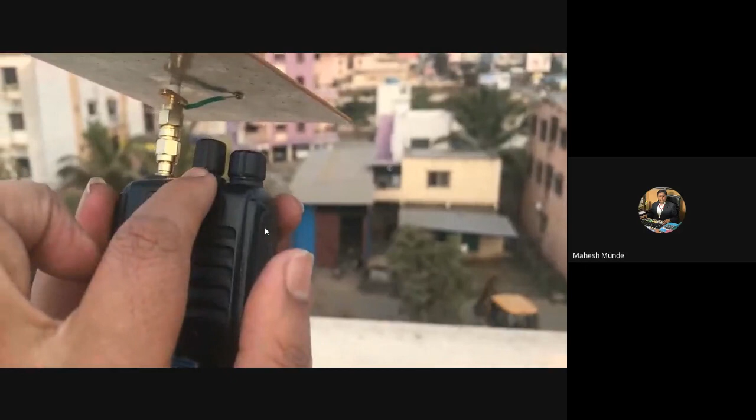This test is called an open area test, where one control station is there. You can look, this is the antenna, which is the AMC antenna, and it is connected with this radio set. And here the channel settings are there. You can look at this type. The channel settings are there. All three radios are set on the same channel, but this is the control room.

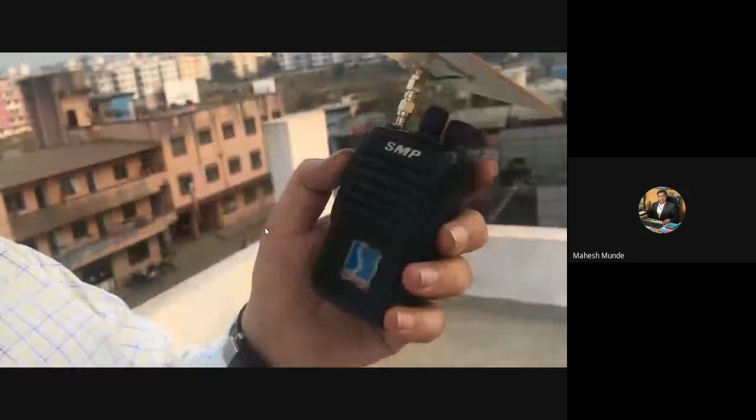And now our mobile van is just beyond this building. We can't locate it with the help of this camera, but we can catch the voice. Loud and clear. Mobile 2 calling to control.

Yeah, Professor Mahesh, that's it from my side. Very nice video, experimental setup you have shown. The participants can buy handheld devices for around 800 rupees. Two handheld devices you require. You go on talking. You can find the nulls also, where you are getting range and where you are not getting the range. Yes, sir. That experiment we can do. Yes, sir.